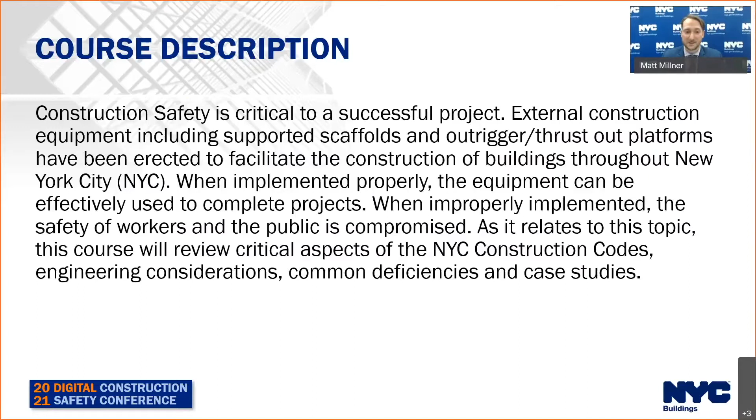Some of our learning objectives today: we're going to review the code requirements for both items, supported scaffolds and outrigger thrust-out platforms. We're going to look at common errors and omissions we've seen throughout all phases of these projects, whether that's design, inspections, or implementation and construction. And finally, we're going to demonstrate the importance of this through case studies.

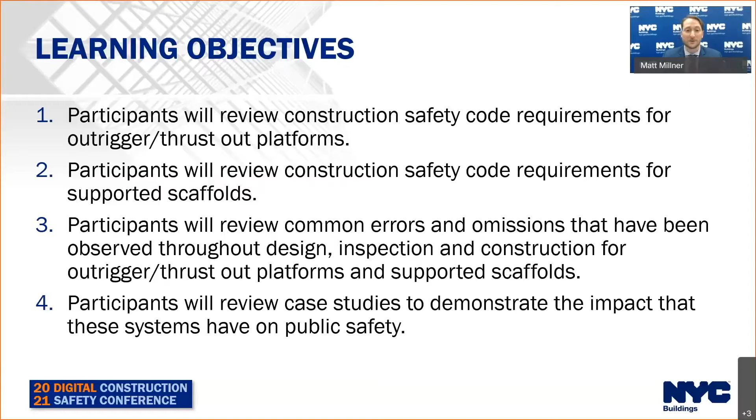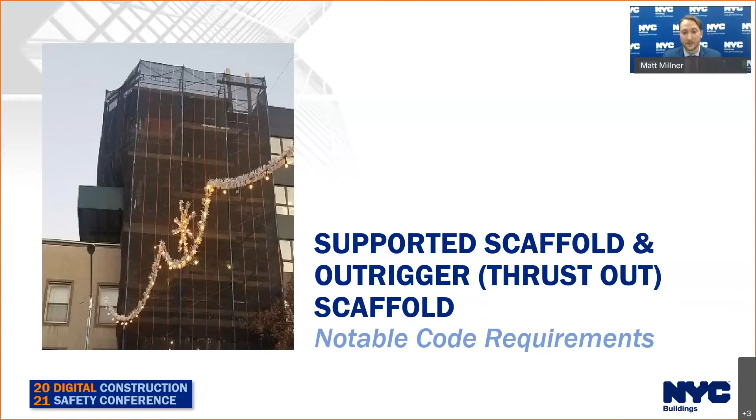We're going to start off with our building code, because that will help define the safety items involved with these elements. Our scaffold provisions are found in Chapter 33, specifically Section 3314. This scaffold section describes multiple types of scaffold, whether mobile, suspended, or supported. Today we're going to focus on supported scaffolds, meaning scaffolds supported by outrigger beams, brackets, poles, legs, uprights, posts, frames, and prefabricated frames.

There are 3 common categories for the loading of these elements. Light duty has a load of up to 25 pounds per square foot. Medium duty can withstand loads of up to 50 pounds per square foot. And heavy duty is up to 75 pounds per square foot. Above that, you'd be into an extra heavy duty category with specific design accounting for the additional loads. It's important to note, especially since we're discussing this today, you're not allowed to have a heavy duty supported scaffold if you're on an outrigger thrust-out platform. The highest you can go is medium duty.

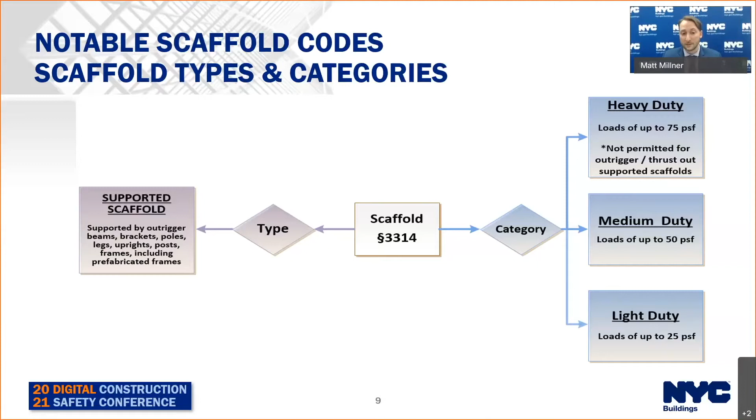When we quantify what medium duty means, this doesn't mean you can place a pallet of materials on top of the scaffold planks. They can't support it; you'll get excessive deflections and potential failures of the materials. So what does 50 PSF mean? Let's visualize it: if you have a 1 foot by 1 foot square and load it with 4-inch brick, 1 layer, you're almost at 50 PSF.

These elements require permits. I think it's safe to start by saying assume you need a permit, and I've provided you with the exceptions to this, which is also in the code. You don't need to take my word for it—this is all published online and available.

With supported scaffolds, you may be exempt from a permit if you meet all of the described conditions: you're not an outrigger scaffold or thrust-out platform scaffold, you don't have hoisting equipment greater than 2,000 pounds, your load is less than 75 PSF, and your height is less than 40 feet. If you meet all of those criteria, you may be exempt from a permit.

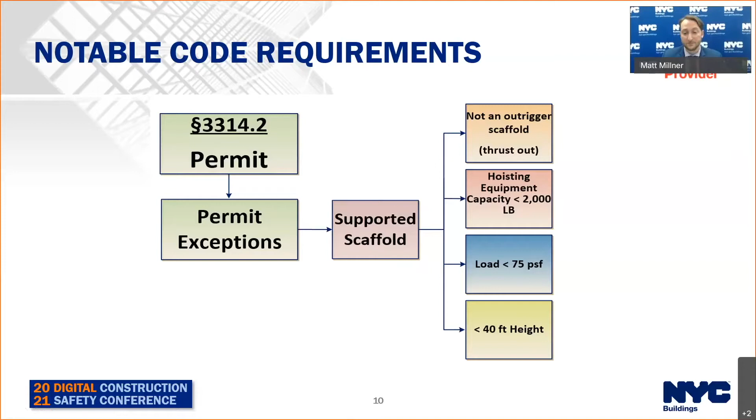The next logical thought is to discuss design. For our particular element today, the outrigger thrust-out platform, design is always required—that's a specific code provision, 3314.3. The design provisions are not solely located in Chapter 33, and that's an important thing to realize.

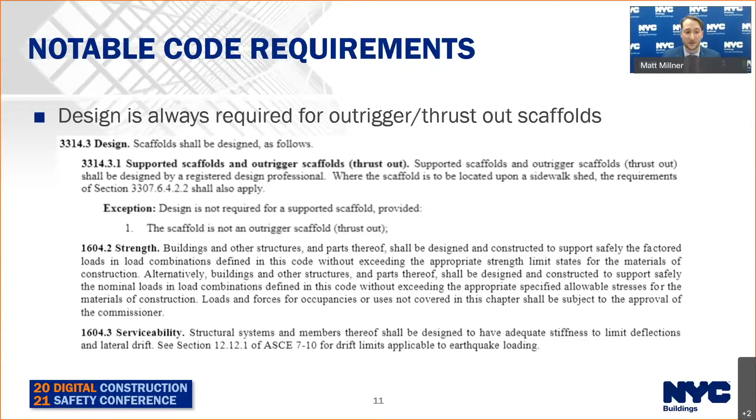Where else can we find design requirements? We have the material chapters, and we also have Chapter 16. Section 1604.2 defines what we need to design our elements to, for the stresses, so we don't exceed the stresses of the material. Section 1604.3 discusses serviceability requirements—we don't want excessive deflections on our members, because that can also result in an unsafe condition.

Our next natural transition is to discuss supported scaffold drawing requirements. We've gone over permits, we've gone over design—now let's look at drawings. This is actually one of the most robust drawing requirement sections in the code, which is great because it gives you specific direction on what we're looking for.

3314.3.3 discusses this in detail. Structural members must be defined, and the foundation associated with the support needs to be defined. That can be many different elements, such as a sidewalk shed, floors, roofs, the ground, or an outrigger platform.

A plan view and an elevation view with full dimensioning and detailing must be provided. We have to locate all of these elements, connections and attachments to the structure, whatever they may be, anchorages, fastenings, tiebacks, must be shown. If your structure needs base modifications to the base building to support these loads, whether it's wind load, vertical load, or horizontal load imposed by the scaffold, that needs to be indicated on these drawings.

The netting associated with this element needs to be identified with the manufacturer and type specified.

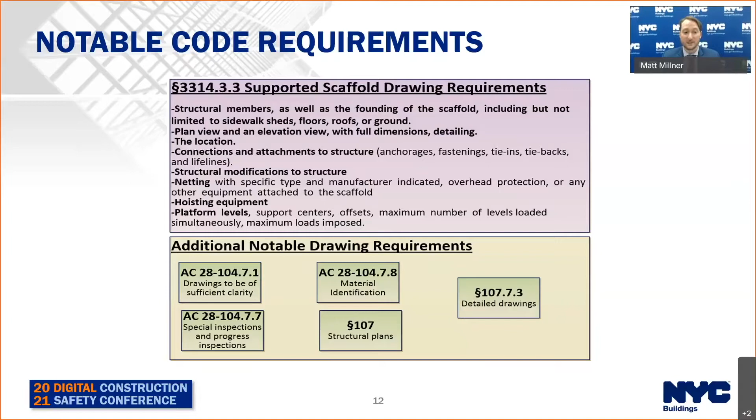Additionally, our admin code has provisions for special and progress inspections that need to be identified on the plans, material identification. Structural plans are a good section to look at because it has a detailed drawing section. These scaffolds are structures. They need to be detailed enough to be able to be built.

One thing we didn't talk about yet is the intent of our code is to establish reasonable minimum requirements. These aren't maximums. Actually, often we see that people exceed the minimums because they need to by design.

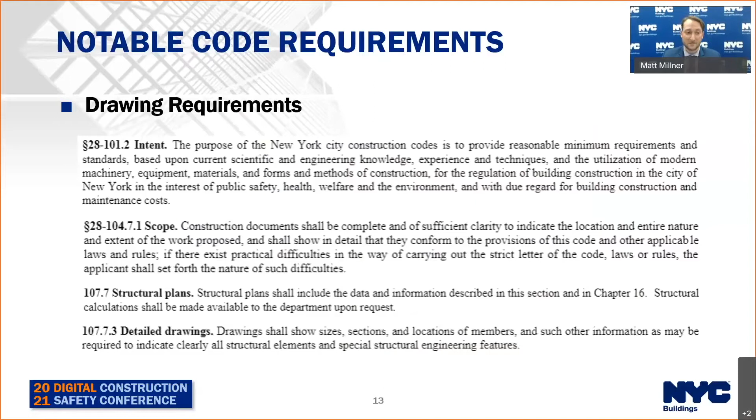Some examples of where we might have special and progress inspections called out for a scaffold would be post-installed anchors. These are elements that require a certain capacity to be tested. And how can an inspector test something if they don't know they have to and what they have to test it to? And if you have base building modifications, you may need to have additional inspections for that base building, such as structural steel or concrete or cold formed steel.

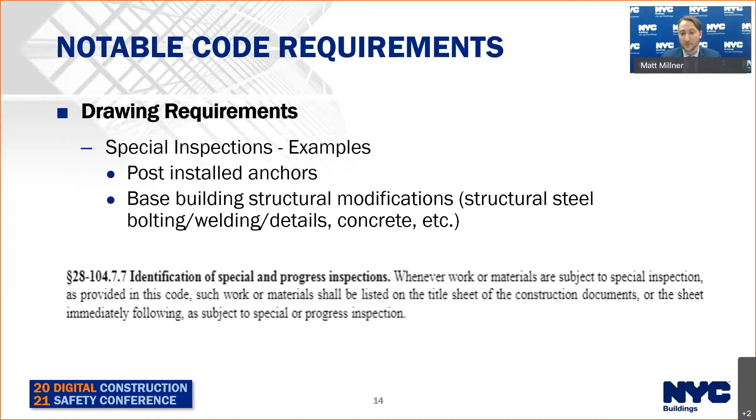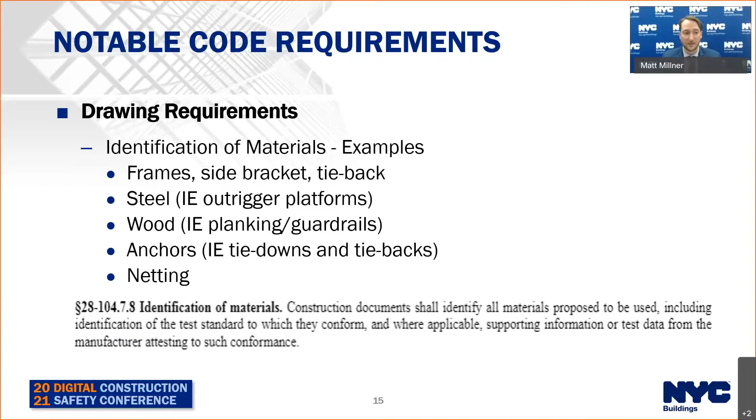In terms of material identification, this is where you're really going to have to define all of the manufacturer call outs or property specifications for the materials you're using, whether they be frames, side brackets, tiebacks. If you're using outrigger platforms, you likely have steel or planking, guardrails, anchors, and netting. So this is an overarching principle in the code, no matter what sort of drawings you're producing.

Now we're going to transition to the safeguards. We're mandated to keep scaffolds and their supports in safe working order. We can't have any known problems, defects, hazardous conditions, or maintenance problems that could compromise the safety of the public and property.

Our loads, now this should go without saying, we can't load an element in excess of what it's allowed to be loaded to. We can get failures. So it's clearly written out in the code, in the law.

Our capacity for the scaffolds is defined. What factor of safety do we need to have? Well, these elements need to have the ability to support their own weight plus 4 times the maximum intended load.

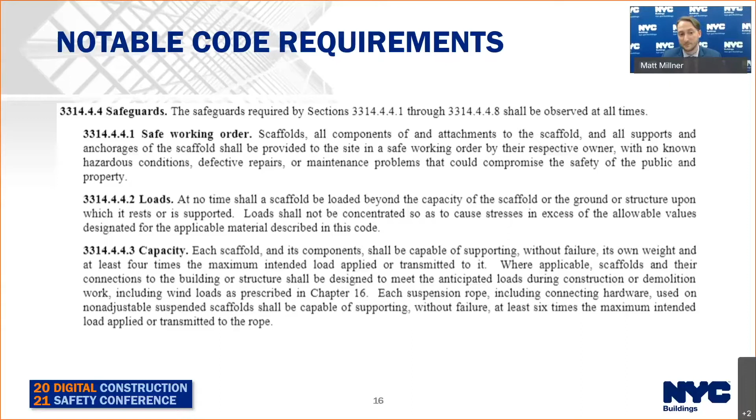The code mandates that we keep these elements stable and secure. You don't want to have these elements lose balance, overturn, collapse, or fall, or have any object from the scaffold, or the user on the scaffold, fall to the public. You'd be surprised how many complaints we get about falling material and equipment, and our next topic, dislodged scaffolds.

The materials and equipment need to be stored and braced to the point where you don't have a dislodgement case. And what may be a primary source of dislodgement? Wind. There's a specific cease use for supported scaffolds and scaffolds when you have sustained winds or gusts that exceed 30 miles an hour. This is a big thing. So how is your site going to check for that wind load? What notifications are you going to sign up for to ensure that you're not working and operating under these sustained winds and gusts?

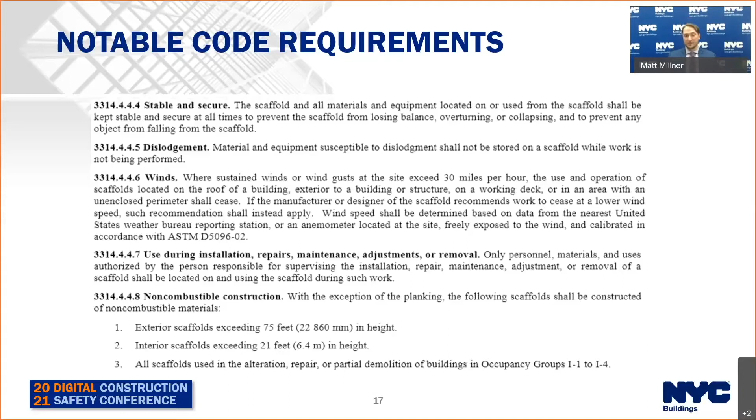There's another common sense principle here in terms of use during repair and maintenance and installation: only people that are qualified or conducting the work are allowed to use it during that time. Generally, the code defines when scaffolds are mandated to be non-combustible—when you have exterior scaffolds exceeding 75 feet in height, interior scaffolds exceeding 21 feet in height, and any alteration, repair, partial demo, and occupancy groups I1 through I4.

Associated with these dislodgements, let's define a critical principle in the stability of these structures: the height to base ratio. When the height to base ratio—the width of our scaffold versus the height—is 4 to 1 or greater, they need to be restrained by elements preventing movement. That may be tying, guying, bracing, or an equivalent means, mandated to be installed at locations where horizontal members support both inner and outer legs. We want to have a load path.

These guys, ties, braces, and supports need to be installed pursuant to manufacturer recommendations or design. At minimum, the first guy, tie, or brace must be installed at a horizontal member not more than 4 times the least plan dimension, measured from the base, and repeated vertically at intervals of every 20 feet or less. Keep in mind these are minimums for scaffolds 3 feet wide or less, and every 26 feet or less for scaffolds greater than 3 feet wide. Horizontally, these intervals cannot exceed 30 feet.

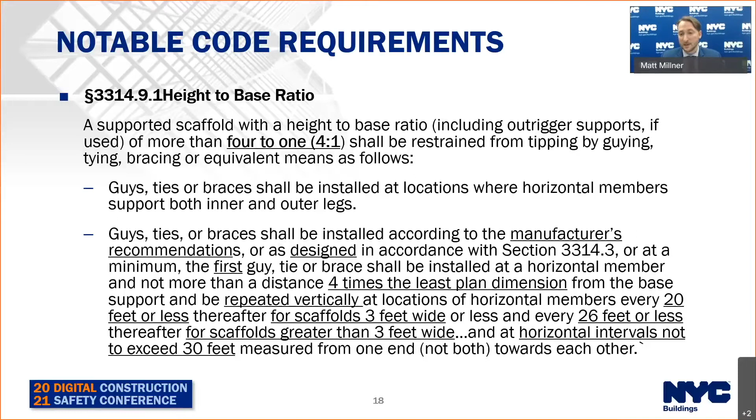Speaking of critical principles, I want to highlight outrigger thrust-out platforms and the critical safety elements that we have specifically in the code. Why might we have something in the code? Maybe because there's been failures. So take that as a lesson learned.

Here's where we get the specific reference as to the maximum loading for these elements: 50 PSF. This is all in 3314.14. It further defines that both our inboard supports and our fulcrum point—the point about which this is tipping—must be restrained against all movement in all directions. That means vertical, horizontal, and rotational. We don't want to have a twist on the element causing a failure. We need to restrain it from lateral torsional buckling.

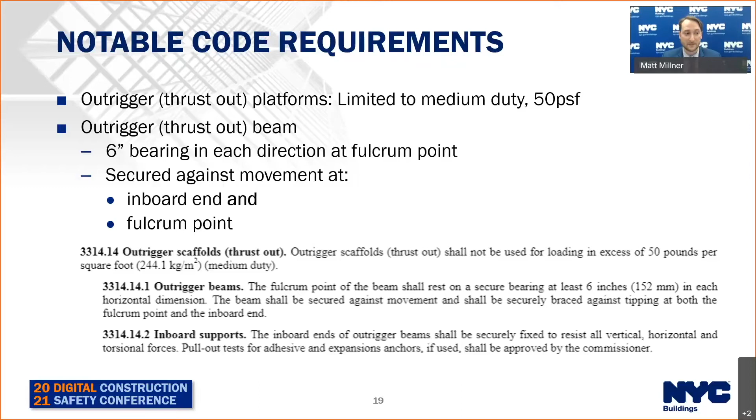If we have post-installed anchors, this is where it specifically mandates pull-out tests for these elements. And what are we testing these to? A factor of safety of 4. In terms of the fulcrum point, this section further mandates that you have 6-inch minimum bearing in each direction. You can't have these elements tip at the fulcrum point or the inboard end—they need to be securely fastened. Makes sense, right? We don't want to have any adventures on our job sites.

Loads imposed are important. Our load path is important. One of the first things they teach us as entry-level engineers is you trace your load path. The scaffold and associated equipment—the outrigger platform—imposes a load on the base building structure.

In terms of loads imposed letters, it's specifically required that when you're on a temporary structure or supporting a scaffold on a temporary structure, there needs to be a signed and sealed letter certifying the acceptability of that equipment, the scaffold equipment, on the temporary additional equipment. That's signed and sealed by a registered design professional, and it must certify the adequacy of the sustained load.

It's important to note that there's an upcoming code proposal which will increase this loads imposed letter requirement to include the base building and roofs—if you have a scaffold on a roof, any base building structure. That would be a great thing to have. It's a critical thing to have. We don't want to have any adventures on our neighbors' properties or on our own property. And it makes sense because you have to check it anyway to have a sufficient design.

Now, while it may not be an official law yet, the department can require more stringent requirements than what we have now. So if there's questionable construction or something that may be deemed essential for the safety of the health of the occupants or users of the structure or the public, in specific cases we can require a loads imposed letter on the base building, and we might. So that's matters not provided for—the department has the power to safeguard the public. You should be doing this regardless.

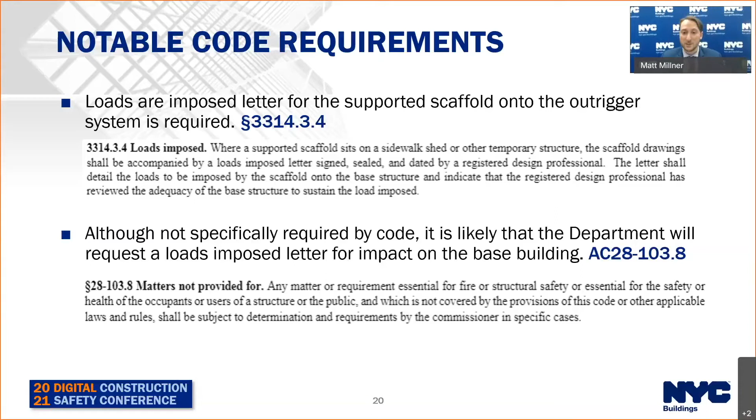So we know loads are important. Support conditions are just as important. The code specifically references footings and anchorage—they must be rigid, sound, and capable of carrying the maximum load without excessive settlement, movement, or deformation, and must be secured in every direction. We don't want to have any adventures, especially as we're using the equipment.

In terms of scaffolds supported on structures, the code doesn't require a letter, but it says you must make sure that the structures supporting this equipment have not exceeded the allowable values for those structures. You need distribution members, such as dunnage or shoring, to help make sure you don't exceed these loads.

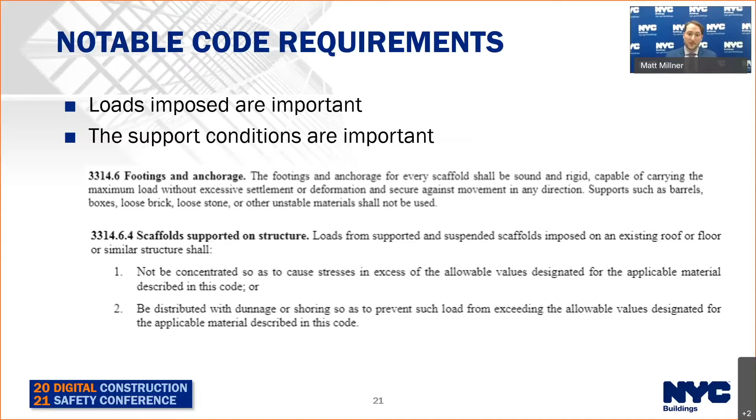So you already have the mandate. You may be requested to provide an additional letter certifying compliance.

In terms of installation and removal, now we've framed a lot of our other thoughts, safeguards, permits, drawings, design. Let's talk about installation and removals. Supervision is required for this because it's a potentially unsafe operation. We want to make sure that it's safe.

The supervisor is a competent person, and that competent person must meet the training requirements set forth in Chapter 33. Now, if your scaffold is 40 feet or more, thus needing a permit, these requirements are 32-hour training plus an 8-hour refresher every 4 years.

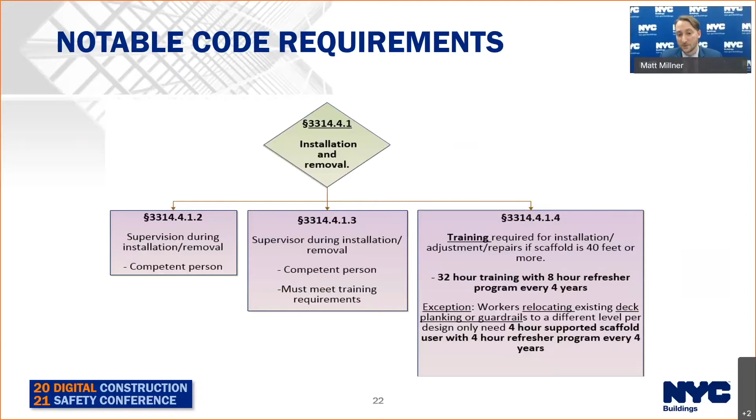If you have a worker that's simply relocating existing deck planking or guardrails to a different level pursuant to the engineer's drawings or the architect's drawings, they only need a 4-hour supported scaffold training with a 4-hour refresher every 4 years.

Now, in terms of inspections, we have our scaffold installed. We need to have a qualified person inspect these elements. So installation inspections first. That person is qualified by both the designer and the installer, not one or the other, but both have to sign off on this person.

They have to have the associated training and be accepted. Their job is to verify all components are safe and in compliance with the design drawings. You can't have use until this has been signed off. And again, with all of these inspection reports, they're not required if design is not required.

In terms of pre-shift inspections, this is a competent person prior to each shift. These reports are signed and dated. You're verifying that the structure is in a safe condition. No use until it's complete.

Now, the code currently does not specifically note this, but this is one of the clarifications being pushed forward, hopefully, as part of the legislation proposals currently underway. The training requirements for this person doing the pre-shift inspection would be a 4-hour supported scaffold training with a 4-hour refresher every 4 years.

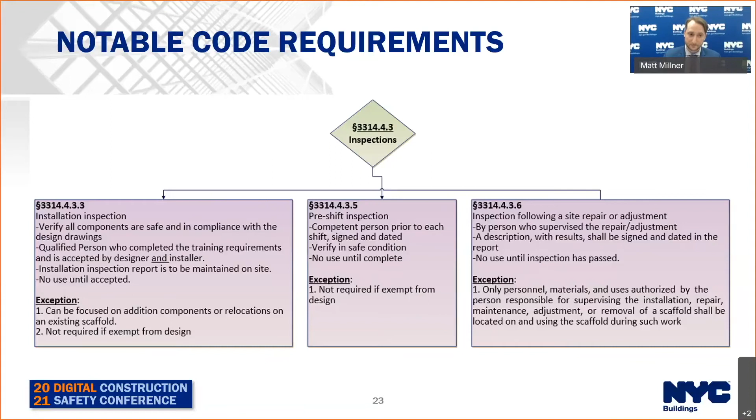In terms of inspections following a site repair or adjustment, that person needs to have a description of the results, be qualified, have a signed and dated report describing what was done, how it was repaired, and what the outcome was. No use until that report is done either.

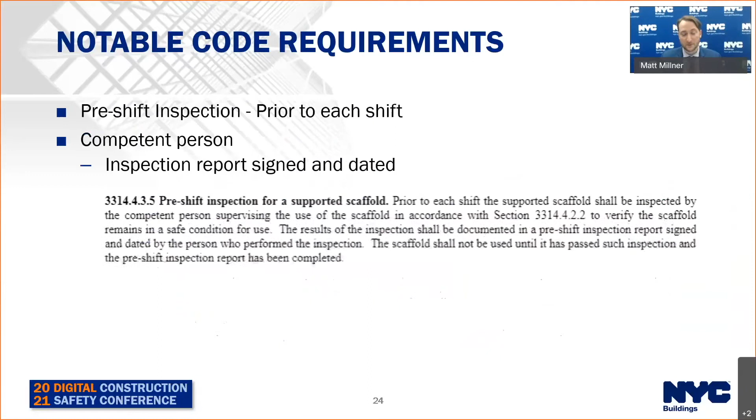Now, just so you don't have to take my word for it, I've provided the code sections for you. We've gone through them. They're available for your future reference when this gets posted. So we're just going to skip past a few of these.

I want to acknowledge that there is a history from the Board of Standards and Appeals for supported scaffolds. There's BSA meeting minutes 362-44-SM that have some standard criteria for cookie cutter supported scaffolds. The second you have a registered design professional signing and sealing plans, this BSA is irrelevant, doesn't apply. I don't want to see notes on the drawings that say design this or build this pursuant to the BSA, because you're specifying a design.

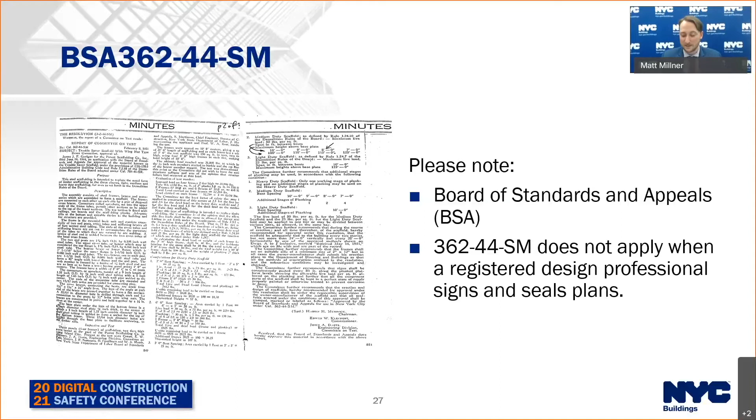Now let's talk about some common errors and omissions for supported scaffolds. This is one of the most critical sections I can go through. We've gone through the code now. We're going to start getting into the application of the code and why it's important.

Now, plans may not be project specific. This is a big one, and it happens a lot. The risk here primarily is that you don't account for the building geometry. How can you build something without accounting for the structure that's in place? You don't get the setbacks, the existing cornices in place, and then you have field modifications that cause potential dangers to the workers and the public. It's unnecessary.

Beyond that, as we started getting into, it may not be coordinated with the shed that supports it, the building that supports it, or the outrigger platform that supports it. We have seen anchorage to compromised walls. If you're trying to support a scaffold with a compromised wall that you're repairing, that doesn't make much sense. You already have a structurally compromised condition and you're making it worse, actually increasing the hazard.

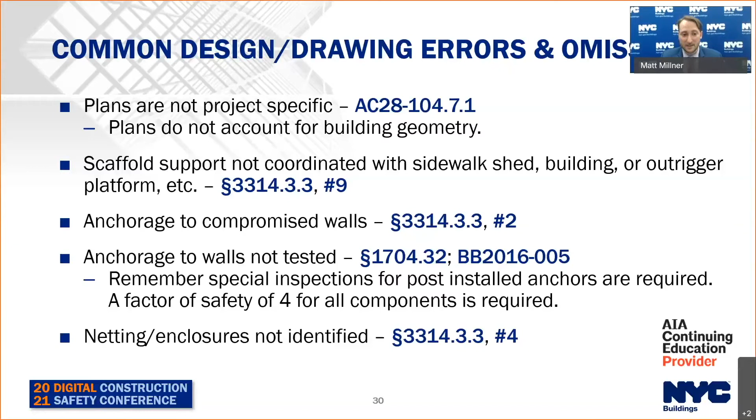In terms of anchorage, we also see testing not done, without having post-installed anchor inspections identified, the load requirements to test identified, and this is a problem. We then have a questionable constructed scaffold. We have netting and enclosures not identified and erected.

For our permit holder, I don't want to leave you out of lessons learned here. We see work contrary to approved plans. We see a greater number of working platforms than what's allowed. These are design items because it relates to our load path and the founding and the excessive deformation. We see missing diagonals, cross bracing, and tiebacks, all critical safety items.

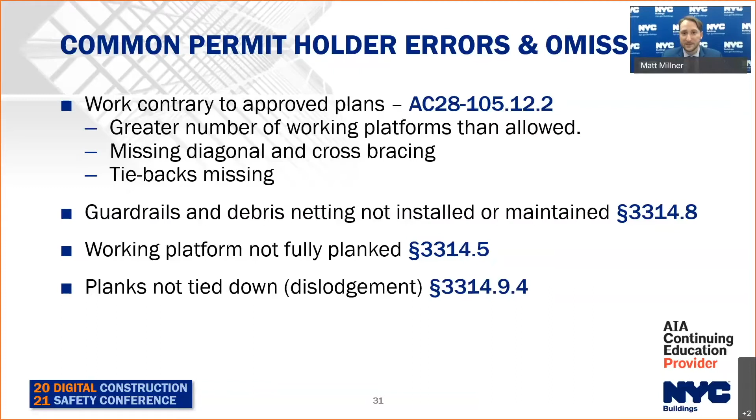Guardrails, debris netting not installed or maintained, working platforms not fully planked, planks not tied down, subject to dislodgement. Material false statements on inspection reports.

With that said, let's go into some field deviations that we see from time to time and define the code layout that will frame our thought on it. We see cut frames, whether horizontal or vertical, and horizontally cut frames certainly will reduce the capacity of the elements and be a significant safety issue. Vertically cut frames are likely because you didn't survey the sidewalk, the existing setup, and the building itself, and they're preventable. They can be adjusted with grillage and dunnage that will help spread out these elements and you won't have to cut members.

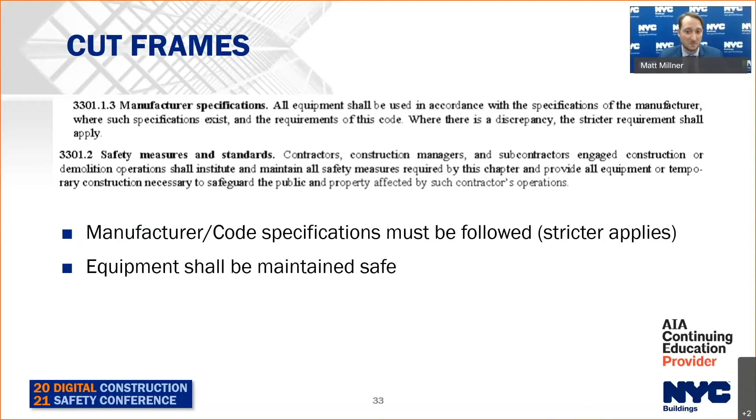But let's define what the code says. Manufacturer specifications must be followed. Safety measures and standards: people engaged in these operations must safeguard the public and property and institute all safety measures. Manufacturer specifications and equipment must be maintained safe. Beyond that, unsafe equipment must be taken out of service and removed from the site.

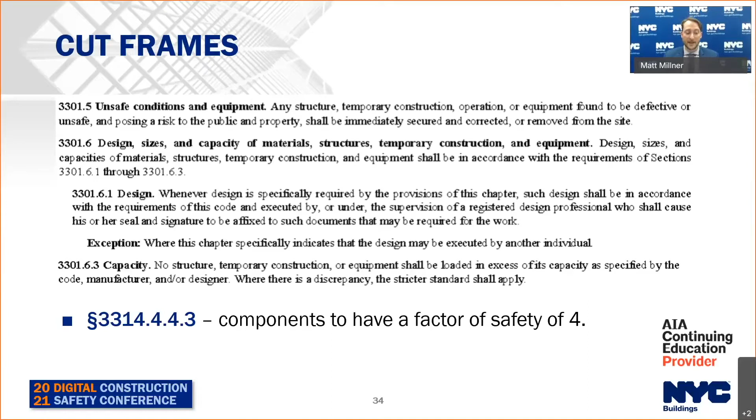We have our capacity of members defined as a factor of safety of 4, so all of the components. If you have something that you've altered, how can you demonstrate that you have a factor of safety of 4? It's going to be an uphill battle to try to get this accomplished.

You don't want to be in that position. In the unfortunate event that this has occurred and is found in place, then I would suggest having something like the following prepared. We need to have site-specific details of all modifications that were made, with a manufacturer letter that indicates that they've been reviewed and accepted for the field conditions. It's unlikely that you'll get this.

A manufacturer protocol for accepting the means of cutting these frames. How are they cut? Were they torch cut, which may diminish the capacity of the material? Were they saw cut?

Testing data for the cut frames, which includes any sort of eccentricity and moment that would be induced from members connected to it, your side brackets for example. And then that manufacturer needs to have a New York State registered design professional provide the recommendations in a signed and sealed letter, and it has to be accepted by the applicant of record.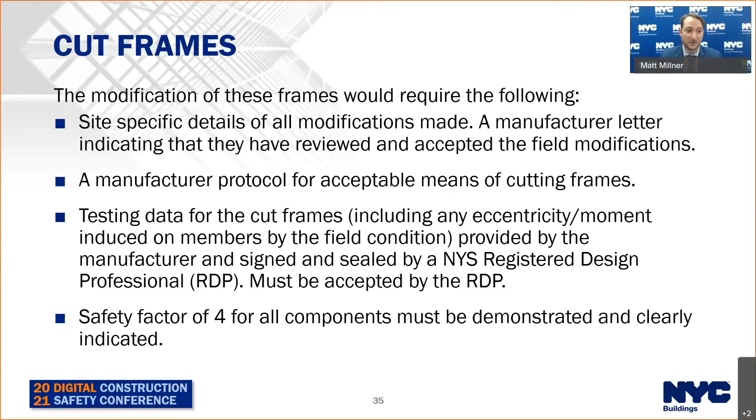And then finally, as we described, we need to have a factor of safety of 4 for all the components, and it has to be clearly demonstrated and indicated. So you're going to have to develop a strategy for doing that. It's a hard thing to do, something that we don't want to see, and it's not required if you have proper planning. In most cases, we see that equipment get taken out of service and removed.

I think this is a good opportunity to get to our first case study for supported scaffolds. Dislodgement and anchorage is a pertinent item to start with because it's one of the items we see happen the most often. This particular incident happened during a wind event that was within the last year.

We can see 2 main things happened. The actual frame itself cracked under the wind loading and dislodged. Makes us question the anchorage and the existing design. And the planks weren't secured. Our planked levels created a secondary hazard.

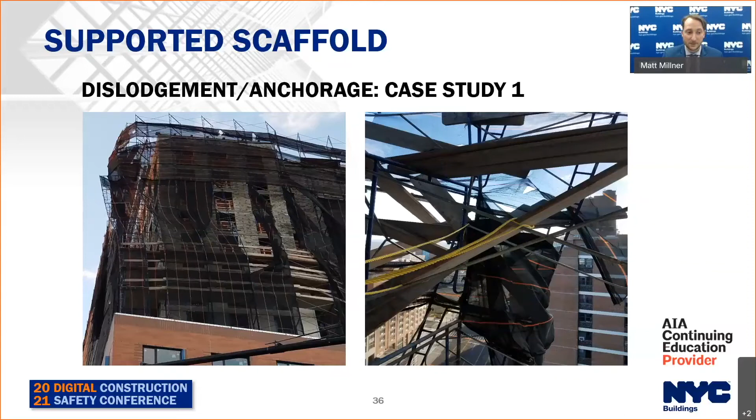They got caught up in the netting and are hanging above a public right-of-way. So this is very hazardous, especially during these wind events, because the wind doesn't stop when we want it to. It continues, and it might take a long time to secure this, and the public's exposure to this danger is increased.

So with that said, it turned out that it was a design problem in terms of the frame itself. The dislodgement of the boards was a builder problem where they weren't secured to the scaffold system. That should never happen. So we have a deficient wind design. Chapter 33 actually references back to Chapter 16, which tells you to follow the wind loads for Chapter 16 for the design of scaffolds. You're not exempt from wind loads.

We had to take some immediate actions. Those actions included street closures and emergency work to secure the scaffold and the associated components. But as you can imagine, this emergency work was not an easy task. We don't want to have a situation where we have to put personnel in danger or increased risk because we haven't done the right job to start with.

After this incident, everything gets secured. The owner decided to replace the applicant. It's their discretion - they decided to replace the applicant and get somebody that would do the right job.

That scaffold is redesigned to account for the wind forces that this area was exposed to. And it wound up being that additional tiebacks were included, especially at the corner locations to account for the corner forces.

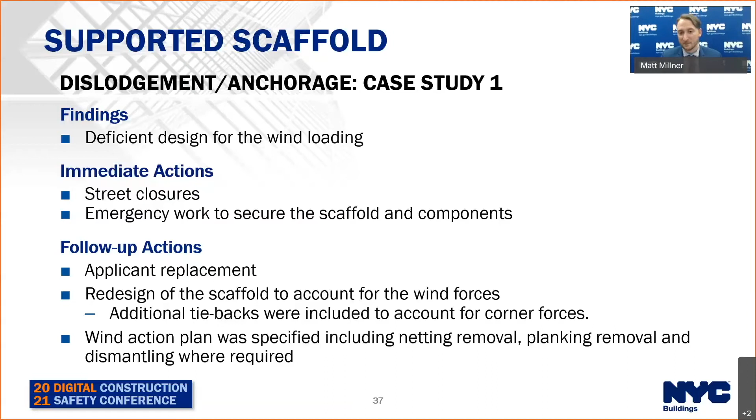I don't see how that's personally feasible, especially in a wind event that goes across the city. It would be very difficult to do all of those actions, especially with staffing capabilities, and you can't be too many places at once. So a wind action plan is not something I think is feasible. But in this case, they proposed that as well.

Our next study is related to the bracing and anchorage of these supported scaffolds. This is an example drawing of a supported scaffold attachment. You can see the anchor location and the spacing of said attachments and anchors, which appear to be generally in compliance with the code. The balance of information was on other drawings.

One big thing we want to point to is that the brick wall itself was identified. Here's an elevation of the scaffold and a section through it. If we look at what actually was out there...

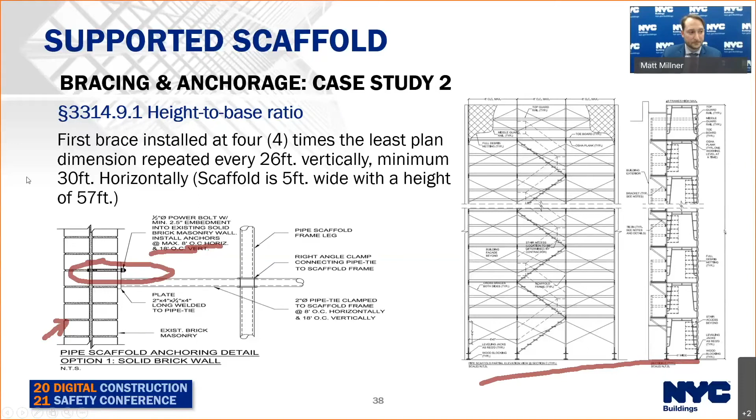We look at what was actually out there, and we can use some of our existing lines on this slide now. We see cold form steel framing - it wasn't brick masonry. So we have a different material type on site. That's problematic - we have work that was performed contrary to the drawings.

We have an installation inspection and pre-shift inspection that were falsified. Now again, the department relies on the accuracy of these certifications by a competent person that has the training to be truthful. If it's not truthful, you're not doing anyone a service. There could be a secondary incident and hazard.

And I can tell you that this attachment requires a design - it's critical that this has a design. This cold form steel framing does not have residual capacity in many cases. It's designed to be very efficient, and you're trying to save material when you use an optimized system like that. You might need additional reinforcement and base building modifications, like the code mentions, to have something like this.

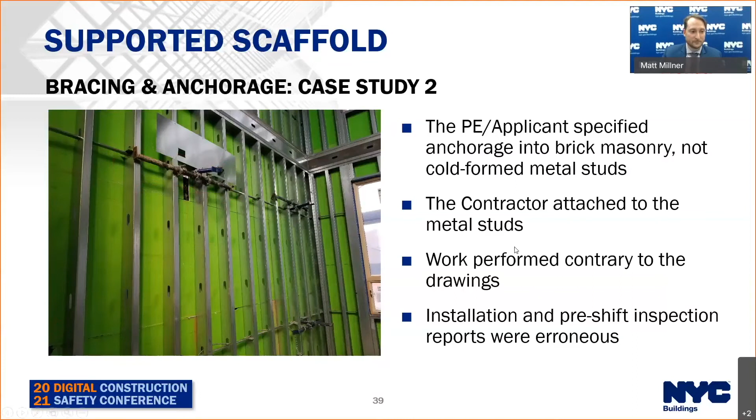Now let's get into some outrigger, thrust-out platform, common errors and omissions. I want to preface this whole section by saying that the coordination and location of these elements is critical, whether you're doing an alteration, a new building, or a demolition site. You might have some different considerations in each case.

For example, at the demolition site, if you're removing floors or sections of floors or whole floors, that might impact your support and your restraint conditions, and the sequence needs to be coordinated. This is a thing you would want to coordinate on your drawings because you're looking at the loads imposed on the structure.

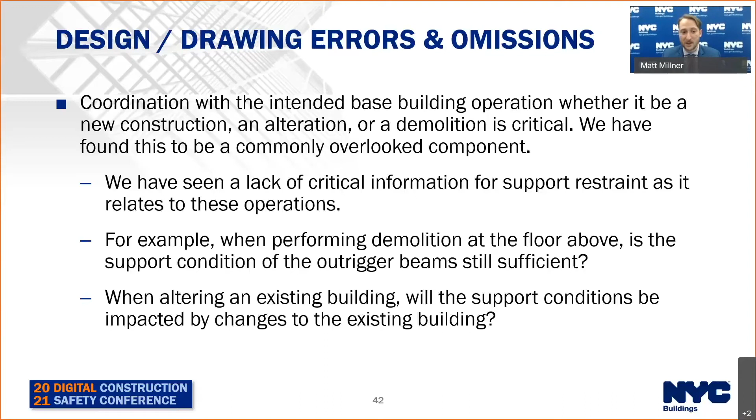When you're altering an existing building, perhaps you're creating new openings, perhaps you're changing that base building or adding additional columns. That's why this needs to be coordinated in advance - you can't have your outrigger and support locations conflict with the proposed information.

So beyond that big picture framing for this, we see wrong code sections cited. I saw one this morning, actually. We still see 2008 code references and prior, which is a little crazy since we've had a new code since 2014.

We see the scaffolding for these platforms that get supported on these platforms not shown on the drawings. We need to see those related applications so we understand, and the contractor understands, what's going to get built. The inspection requirements for post-installed anchors and other materials are often missed and not identified. That's a crucial thing, so these can't get inspected if that's not identified.

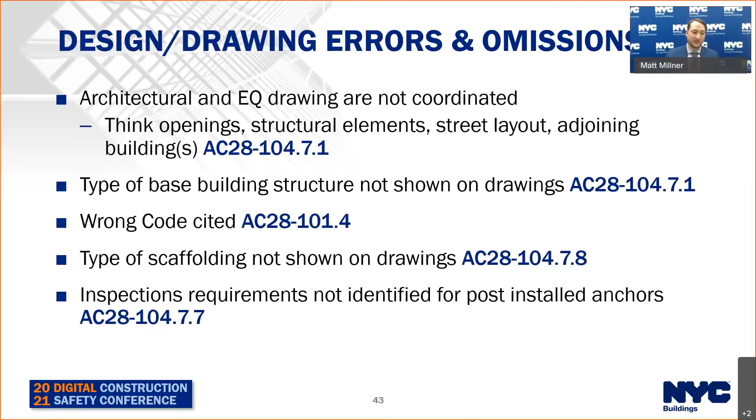Additionally, we have seen design failures where the beams don't work for analysis. That's both junior beams and the outrigger beams. That's a very significant issue.

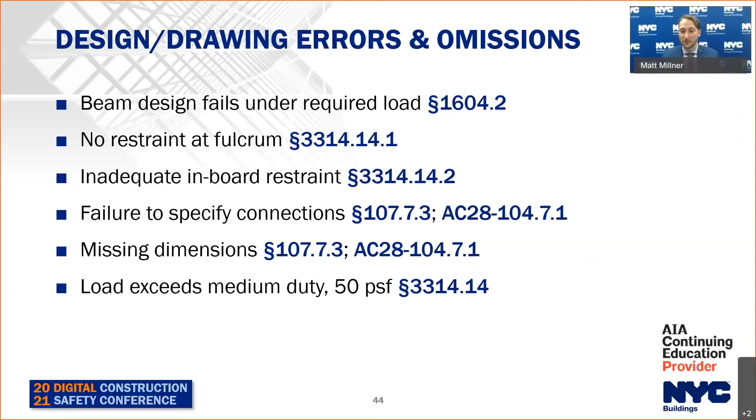We've seen no restraint at the fulcrum. That's a significant hazard. We've seen inadequate inboard restraint or supports varying locations that don't match the plan, or that don't match and get coordinated with the field conditions. Failure to specify connections, missing dimensions, and loads called out greater than medium duty, which is not permitted.

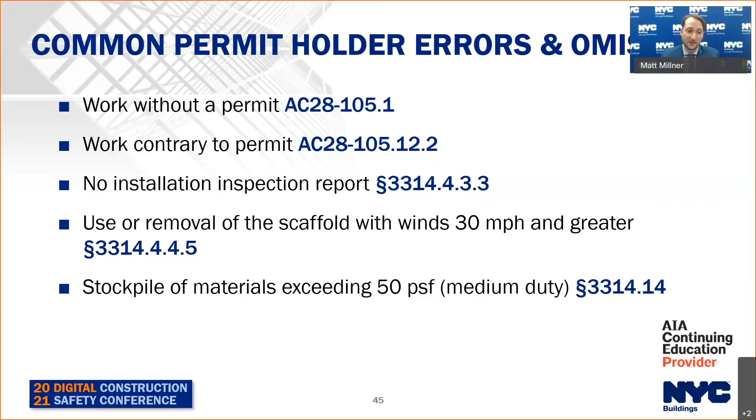For permit holders, we see work without a permit, work contrary to the permit, varying support conditions, for example. No installation inspection reports getting coordinated before use or removal, or changing the scaffold with winds greater than 30 miles an hour, and stockpiling materials, dropping pallets off on the planking—not allowed.

In terms of our inspection errors, it's pretty similar to what we saw for supported scaffolds, where we see tons of material false statements. If you have an incident on your site, I guarantee you the first thing the department asks for is your installation, pre-shift, and maintenance inspection reports.

This is not something you want to falsify. This is the line of defense here in these systems. Failure to notify the permit holder and design professional of any deviation from what was mandated in the design and permitted by the department, and no inspections conducted at all.

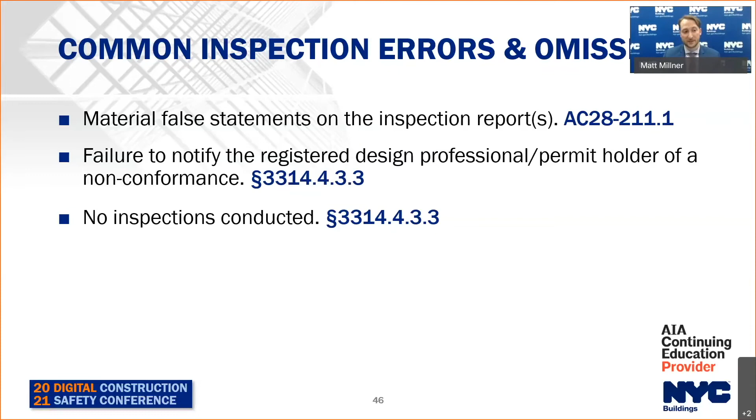Now let's think about some remedial actions that might be required if we have an incident. In terms of the department's involvement, if you have an incident on your site, I can assure you that there's going to be follow-up inspections.

It may get sent to engineering technical review, which will be with my team. That's not a place you want to be. You could have cease use of the equipment and exterior work. This will create delays to your project, change orders, a whole mess. You don't want that, besides the public safety hazard.

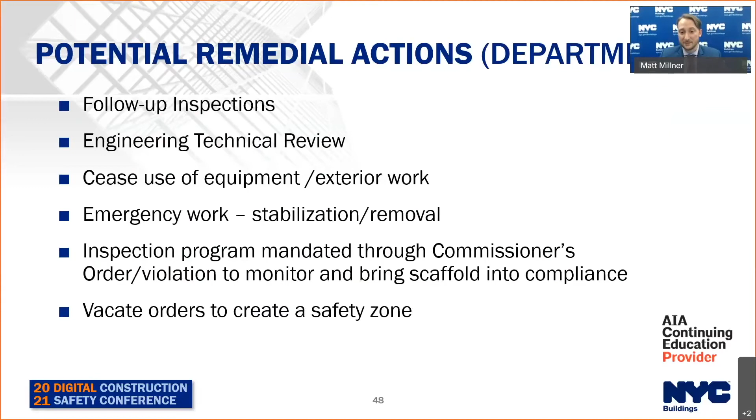You might have emergency work that requires stabilization or removal, monitoring. We might mandate an inspection program until this is brought into compliance, meaning frequent structural stability inspections after wind events or during this removal or securement. And the department may need to create a safety zone because of the overhead hazards through vacate orders. It's not something we want to do, something we're forced to do.

Now let's think about the secondary hazards that we may have to deal with if we have an incident. We have to secure or brace something. What's the wind load during this? Are we able to successfully accomplish it during this wind event?

Is the existing work in conformance to start with? Or are there secondary hazards that we need to identify and mitigate along with the primary hazard we've identified? This is a real risk, I assure you, and it's come up many times.

Now, generally, these platforms will have a supported scaffold on top of them. What's the interaction with the supported scaffold? And is that supported scaffold tied to the base structure? Because that may be inadvertently creating additional restraint of some fashion.

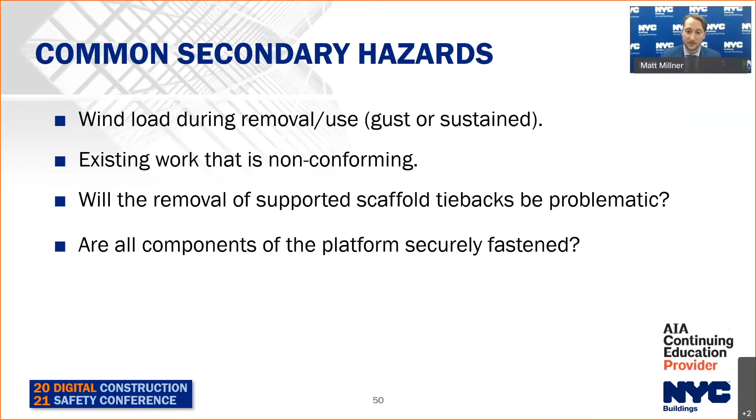Will the removal of any of those tiebacks be problematic going forward? Then finally, are the components of the platform securely fastened, or do we have another tipping or dislodgement hazard on our hands?

Our final segment will be getting to some case studies for these platforms. I think it's worth taking a look at our first photo again, the subject of our presentation. We can see our supported scaffold at the front. At exposure 2, the left side, we see an outrigger platform with a supported scaffold on top.

I'm just going to highlight an initial thing we can see from the street. Our outrigger beams—I'll try to draw them because it's a bit hard to see—I think there might be one here. They don't go full length. That's a problem. We have a deck that's cantilevering out.

with a guardrail system, or in this case, a parapet that's acting as a guardrail system next to it. So we know that we have a hazard to start with, but we have a scaffold in place that has tiebacks in place. So we have a deck that's not in conformance and outrigger beams that aren't full length and not in conformance. We know that off the bat just from the outside. This is before our incident takes place.

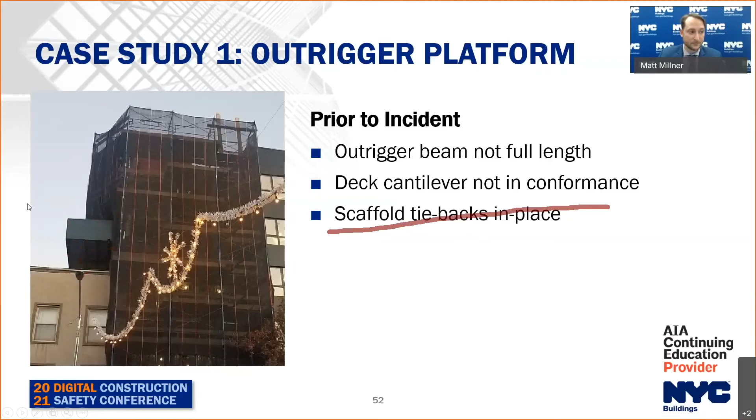So let's see what happens next. We're going to see what the drawings called for, because this will help frame our case study. Our drawings start by calling for inboard supports. We can see that—I'll draw a little arrow here. So the inboard end has some supports, and it has some rotational support shown with a related detail somewhere else on the drawings.

It defines a concrete slab. We're going to see how accurate that is. We see a brick wall called out, at least graphically depicted here, called out elsewhere on the plans. So the base building has a brick wall, according to this.

We see an 8-foot length projecting from the face of the wall, 12-foot length inboard. We have the cantilever outrigger beams identified, W8 by 15s every 8 feet on center with a 20-foot main beam. Well, 12 plus 8 is 20 feet, so it doesn't look like the designer has accounted for our wall thickness. That might be a problem for us here.

It calls out junior beams at 2 feet on center, and it shows no deck cantilever—so we don't have a cantilever space out here because our beams are supporting it. All right, so now we've defined what was intended to be built, although we have some errors.

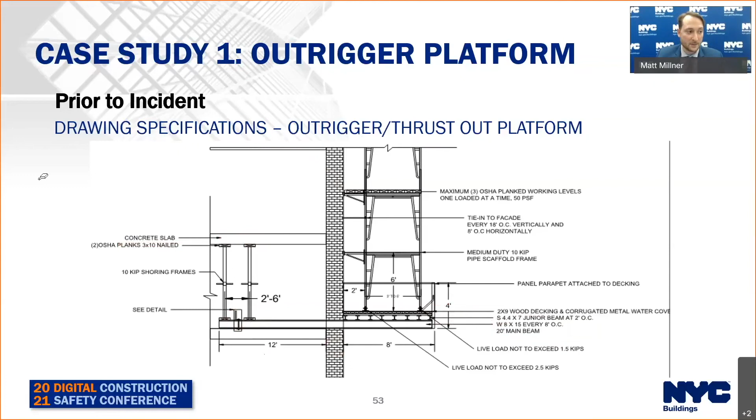Let's see what happened.

During this incident, we had an overloading of materials. They were actually removing parts of the scaffold and stockpiling them on the edge of this cantilever system with a cantilever deck that was non-compliant. And they were patching the exterior wall as they were going. During this patching operation, they disconnected the tiebacks.

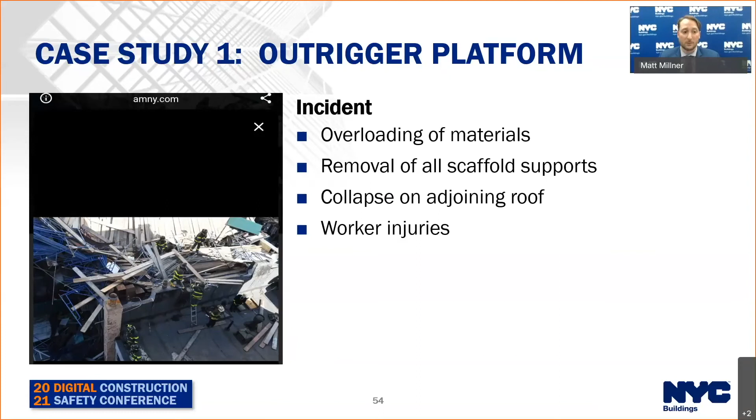These tiebacks were providing additional restraint for the scaffold, and in some ways restraining the fulcrum point to an extent of the outrigger platform. Upon this removal, during a windy day with winds that may have been projected to exceed 30 miles an hour, there were reports of this scaffold walking out. So as the wind was blowing, this scaffold was walking towards the edge of the platform, and eventually the platform hit a critical buckling moment, had a lateral torsional buckling failure of the beams, and a collapse of these materials due to this overloading and improper build of the equipment and improper falsification of the installation.

Worker injuries occurred. An emergency operation occurred to help rescue the workers, putting public safety personnel in harm's way.

Remember, we don't live in a bubble. Our operations impact other people and the city. With that said, we have overhead hazards for the neighboring properties. This is a problem. And we might have a remnant hazard still at the rear. So we have to vacate this building, and we're going to vacate parts of the adjoining building to create a safety zone.

This is the roof of the adjoining building where all the materials collapsed on. A total failure of the roof joists. Full vacate orders required.

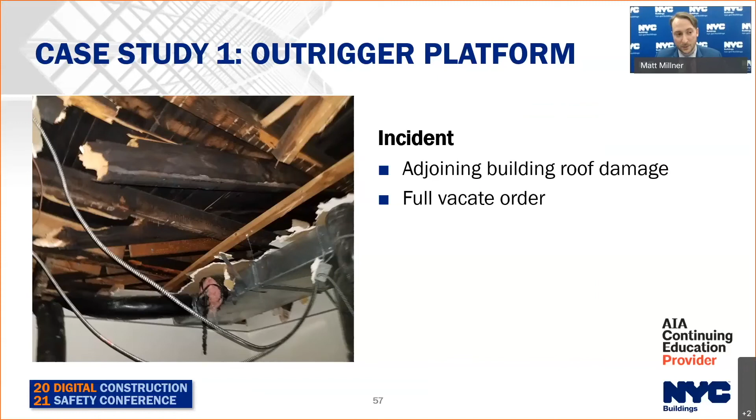We're standing in the rear yard of the adjoining property here. We have remnant overhead hazards, and we can also see we have the same problem with the outrigger system further back in the building. The beams don't project far enough out. The deck is cantilevering, and it may be hard to see, but you can see a visible deformation of the edge of the deck as it's loaded here.

So the removal of that scaffold may be problematic because right now it's tenuously stable until such time we start to touch it again. So we have a partial vacate of the rear yard and the extension of the neighboring building, 2 doors down.

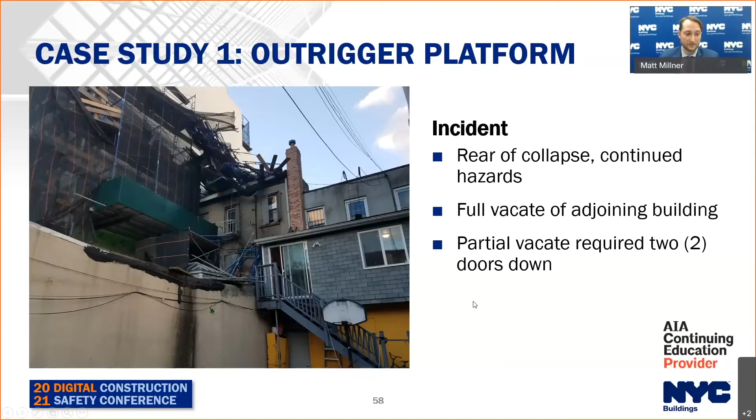Now I mentioned the fulcrum point, the existing structure, and lateral torsional buckling. This is an example, if I've ever seen one, of lateral torsional buckling where we have the steel beams warping from the loading. We don't have any restraint. There's nothing securing the fulcrum point from movement in all directions or torsion.

Additionally, I don't see brick. This isn't a brick wall here. You can see cold form exterior stud wall and a steel building. So we don't see brick. So this was never designed properly for the application.

And if you're going to be bearing this on cold form steel framing at any location, this opening that we're looking at here on the left side was also not on the plans or part of the design. So it wasn't coordinated with the building. But if you're going to have this bearing on cold form steel in any location, a distribution track is likely. You need to have a distribution member because the tracks for the cold form steel are not designed to be in bending like that, and those individual studs certainly will not be able to take that force. You may need to double up, have built up members to receive this loading.

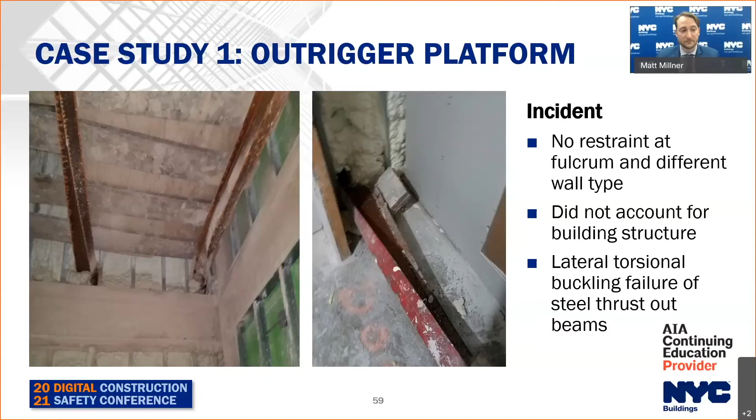So let's take a look back at where we started, at our drawings. As we had just reviewed a bit, we see there's that brick wall. So we have an incorrect identification of not just the wall material, but the base building structure itself. We didn't have a concrete structure. We had a steel structure with concrete infill through metal deck on concrete. And we don't see any restraint to this fulcrum point. Even if this is built into brick, it's unlikely it's going to be fully grouted or restrained adequately.

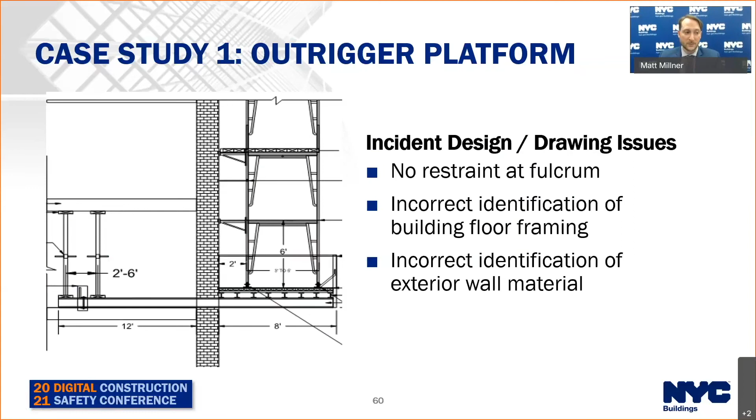So this is a design consideration that was not accounted for.

Just to wrap up what we've discussed, we have inaccurate, incorrect lengths of beams. Maybe they were installed 20 feet and didn't account for this exterior wall composition, so you have a couple foot gap at the end. We have a cantilever that was never on the drawings. Work wasn't stopped by their affirmations of the safety. And we also found that the inboard support locations varied. The spacing of these beams varied as well. We had removal of scaffold tiebacks and use of this equipment on days that exceeded 30 miles an hour, or potentially exceeded.

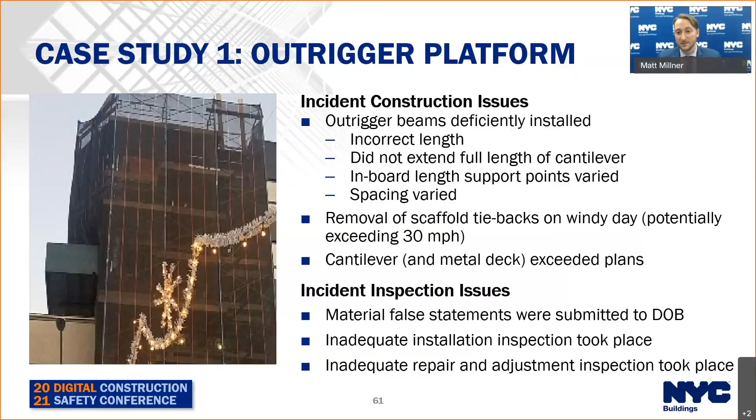In terms of the inspections, same old story here. We have material false statements throughout. There was actually a repair that took place with another falsification, with the intent for the department to rely on its affirmation.

So let's think about some of the lessons learned here. In terms of design, we know that sufficiently sized structural members are critical, along with the fulcrum and inboard supports. We need to make sure that these supports have adequate restraint in all directions, including vertically, horizontally, and rotationally. An accurate understanding of what the base building is crucial, and you're likely going to be asked for an installation inspection report or a load imposed report that affirms that you've checked the base building.

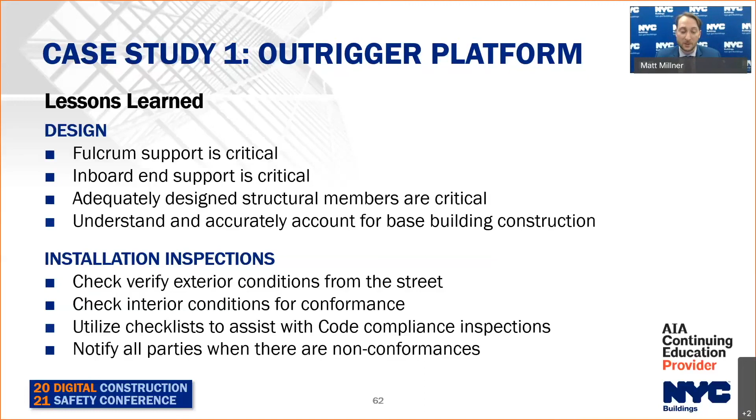From our inspection point of view, let's have some discussion. It's prudent to verify the exterior conditions from the street, and then verify the interior conditions. Make sure everything's in conformance, because you might not be able to check the outboard length unless you're at the street level. Utilize checklists to affirm code compliance, and notify all parties when there are non-conformances.

In terms of the permit holder, we can understand that the fulcrum and inboard supports are critical. Locating these things at the spots where the applicant has placed them is critical, and if they deviate, you need to notify them prior to installation. This is coordinated in advance.

The installation lengths are critical. You must correct hazardous conditions. You can't have a non-conformance go uncorrected. That's part of one of the fundamental laws associated with the equipment.

Overhead hazards will endanger the public and your workers. A cease use is not optional when you have winds exceeding 30 miles an hour. You need to make sure you plan and secure the equipment prior to that. And your construction sequencing is important. Make sure that you coordinate this with the applicant of record prior to removal of scaffold tiebacks.

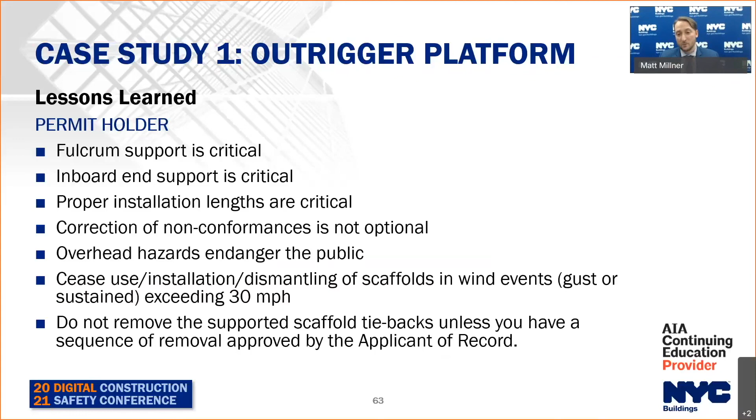Our final case study is a similar topic, and it's going to involve a bracket-supported scaffold. Not quite an outrigger platform, but similar enough that I wanted to spend a few minutes talking about it here. This is a case study from a little bit ago. It took a long time to resolve this stop, to bring this into compliance, and you're going to see why in just a little bit.

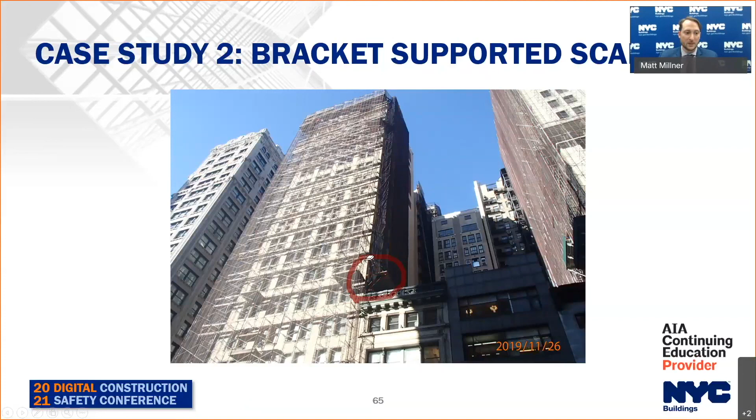We're going to focus on this location of the supported scaffold. It's above an adjoining building, and you'll see that we actually have a bracket platform. So let's zoom in a bit. It's a bit tough to see what we're looking at. I wanted to show this photo to give you an overall sense of the magnitude.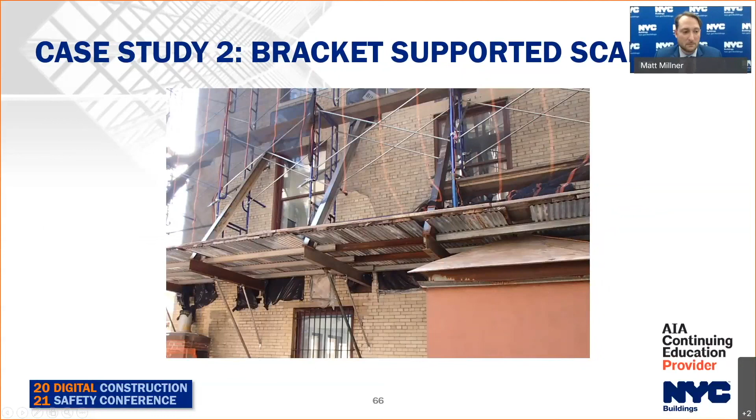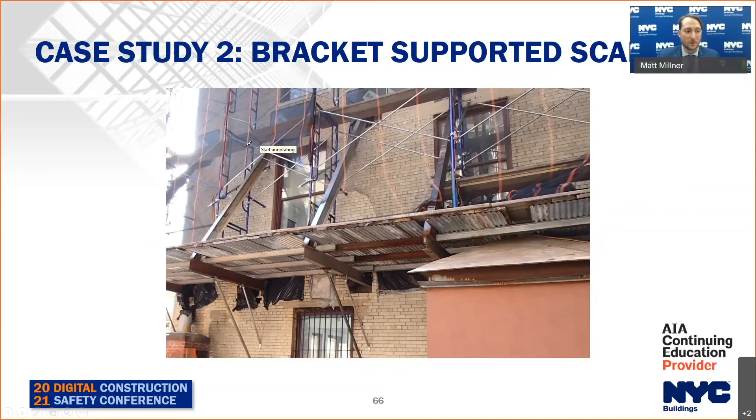Our second close-up here is showing a supported scaffold on this bracket with some outrigger beams. Those beams have supports above and below. The supports look questionable to me. I don't think you need to be an engineer either to see that these supports may be a bit questionable. And it looks like we're tying into some sort of steel structure.

This is in use, so this has a heavy amount of load on it. There are a lot of planked levels. This is not a lightweight structure. So the design is critical for this, and installation is critical.

So what did our design show? Here's the plan view showing the location of this equipment. It specified 160-foot tall scaffold on beam. They don't have the locations of these brackets specifically called out, but they do have this detail D identified.

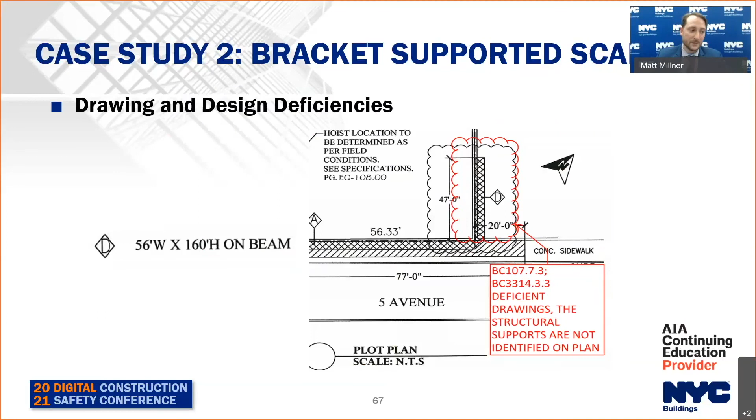Let's see what that detail shows. The answer is not much. The detail calls out a beam size for the horizontal member without specifying a spacing. That's incredibly deficient. They call out additional supports with no specification of size or spacing, and no connection to the base building or horizontal member. And finally, the horizontal member does not have an attachment to the base building identified, or even an indication of what that base building is composed of.

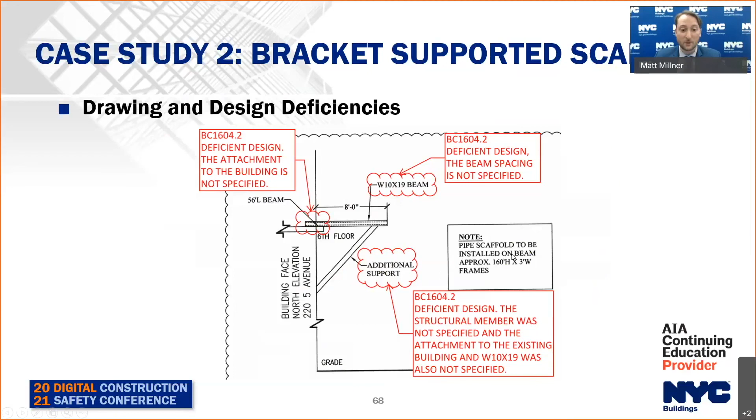An incredibly deficient design, and it's shocking that this passed an installation inspection report that was certified with the intent for the department to rely on it. And it's really a shame that a contractor thought this was okay to build this. And for ownership, this was a huge problem to resolve.

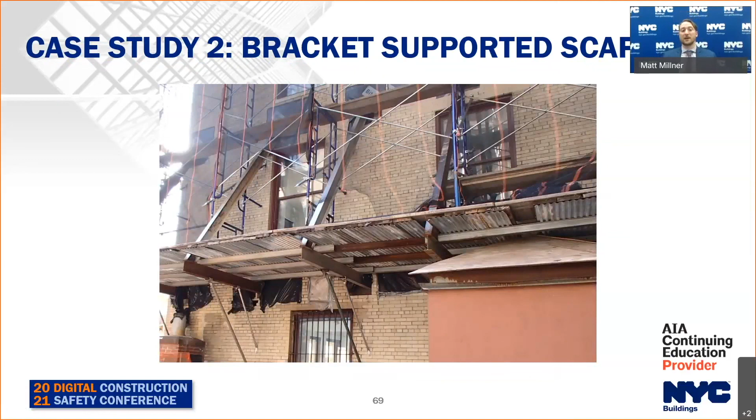Again, this is what it looked like on site. Removing all this equipment is a big operation, has secondary hazards, and additional reinforcement may be required prior to that operation. You don't want your project in this situation.

So to summarize some of the results here, it had a long storied history, but it resulted in the removal of the non-compliant scaffold, a long-term stop work order. There were engineering technical reviews of this and all the other exposures, and all the parties involved got OATH summonses - the permit holder, applicant of record, so on and so forth.